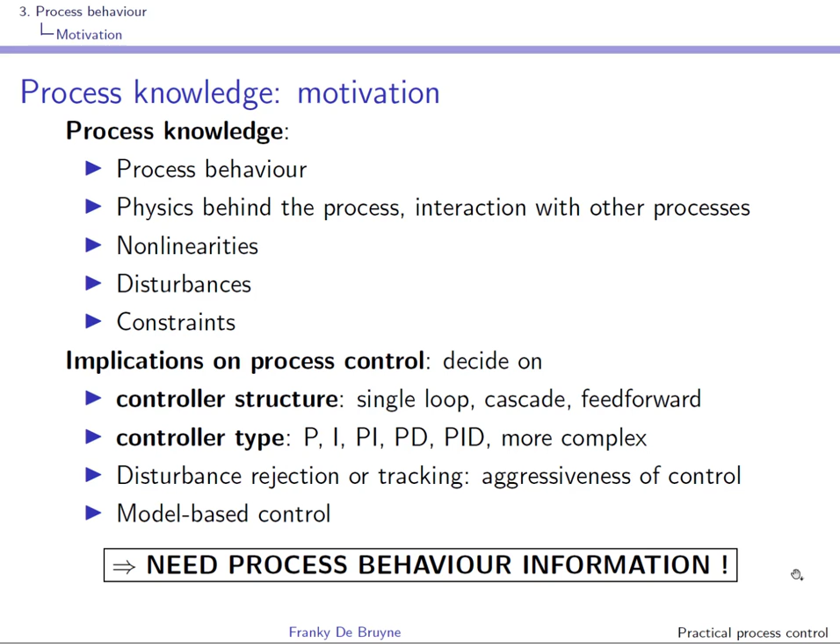At the end of the course, you should be able to select the appropriate controller structure and the appropriate controller type, given your knowledge of the process. This means that at the end of the course, and especially at the time of the exam, you must have a mental picture of all the available controller structures and controller types with their associated area of application.

We'll start this section on process behavior with a very important but rather simple concept, the concept of the process gain. In order to obtain this process gain, what is usually done is to apply or impose a step at the input.

The input is MV, the manipulated value. So the increase will be delta MV here. What you're going to do is observe the response of the system, and of course, since the system is almost always dynamical...

You'll have a response that could be this one. The idea of a gain is really the ratio in steady state, meaning the transients have disappeared because the system is dynamic. After a while the transients will disappear and you'll have, after settling, a delta PV.

The process gain is really the ratio between this steady state increase delta PV over the delta MV that has been imposed, and we'll denote this gain as Kp. Kp has units, it's the units of PV divided by the units of MV.

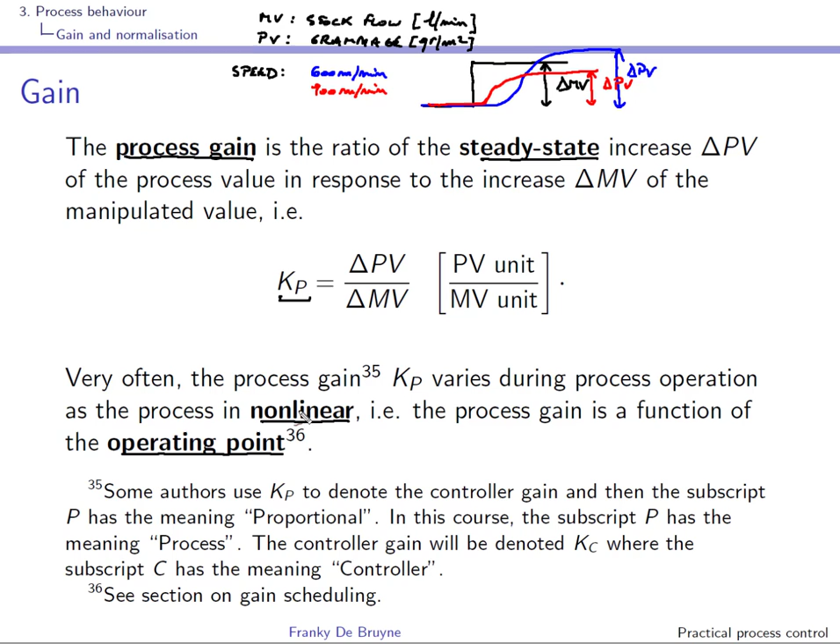Many vendors of control systems work with a normalized control algorithm, and this means that, for instance, PV has to be normalized and expressed in percent of the measurement range, PV min, PV max. In our previous example, assume that the sensor that measures grammage measures in the range 0 gram per square meter up to 200 grams per square meter.

Then PV will be normalized in such a way that 0 grams per square meter corresponds to 0%, and that 200 grams per square meter corresponds to 100%. This is what you can see from this formula.

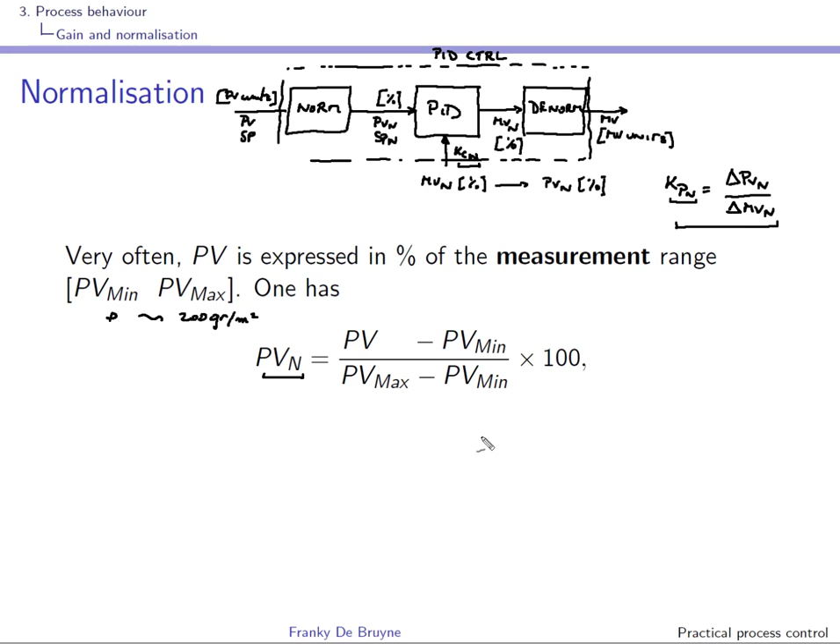As we have seen in the previous explanation, MV is also often normalized, so it is expressed as a percentage, this time of the control range MV min, MV max. So if we take our example with the stock flow, it could be that MV min is 0 liter per minute and MV max maybe 1,000 liter per minute.

So the normalized MV would be, of course, corresponding to 0 liters per minute as 0%, and 1,000 liter per minute would correspond to 100%. The output of the controller will produce the normalized MV, and you can obtain MV by turning this formula around, and this is then what you obtain.

Well, there is an actuator that is often used, and it's the control valve, and there obviously MV min is 0%. This means that the valve is closed, and MV max is 100%, so the valve is open.

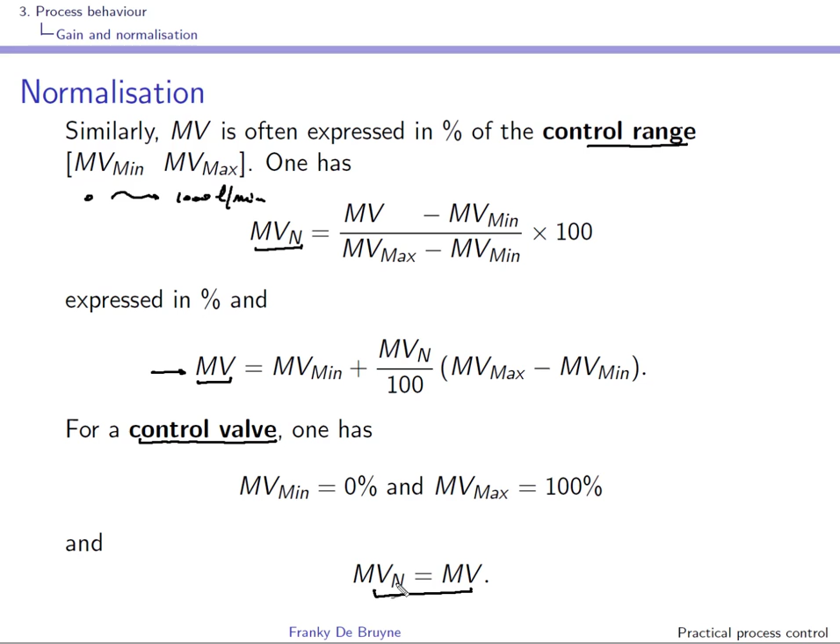So this actuator is kind of normalized naturally, so obviously MV and MVN are identical. The normalized gain of the process is defined as the ratio of the steady state increase of the normalized process value, delta PVN, over the increase in the normalized manipulated value, delta MVN. This gain is expressed in percent over percent, so it's percent of the process value range divided by the percent of the manipulated range.

Normally this normalized gain should be in the neighborhood of 1, assuming that the actuator sizing has been done properly, that there are no nonlinear effects, and if there are nonlinear effects, that you work around an operating point where the actuator sizing has been done, and that the sensor measurement range has been chosen appropriately. A first reason why the normalized gain of the process might be substantially different from one is nonlinear effects.

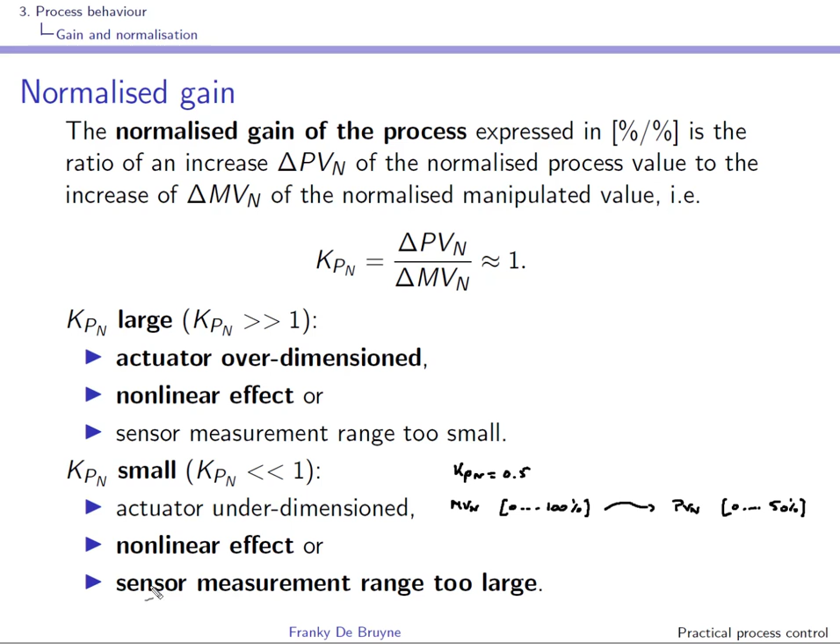So if you see a normalized gain that is substantially smaller than 1 and it is not due to non-linear effects, it's probably due to a sensor measurement range that is too large. There is a link between the normalized gain and the unnormalized gain of the process.

This normalized gain is important because some vendors implement a normalized PID controller, as I've shown. So it will be very important to use the tuning algorithms introduced in section 5 with the appropriate gain. If the PID algorithm is normalized, you have to use the normalized process gain. If it is not, you have to use the standard process gain.

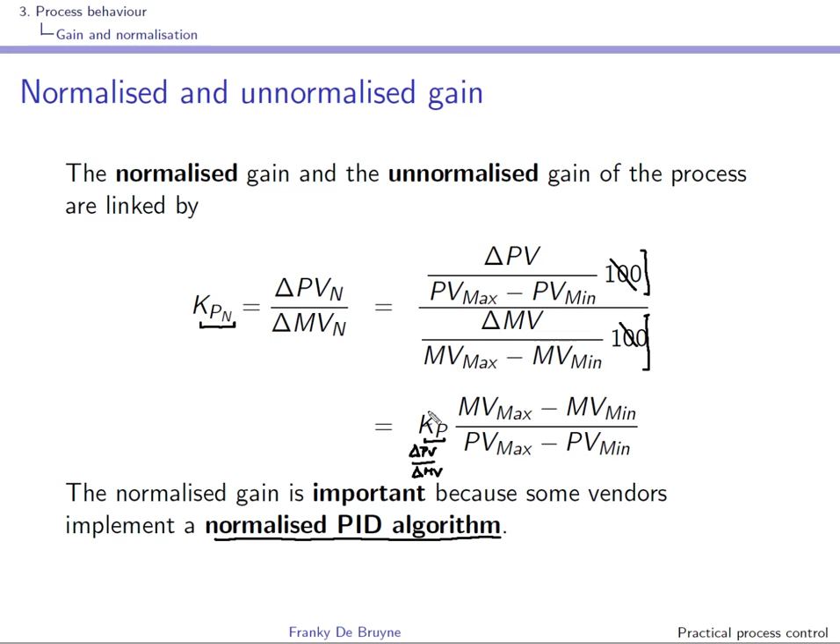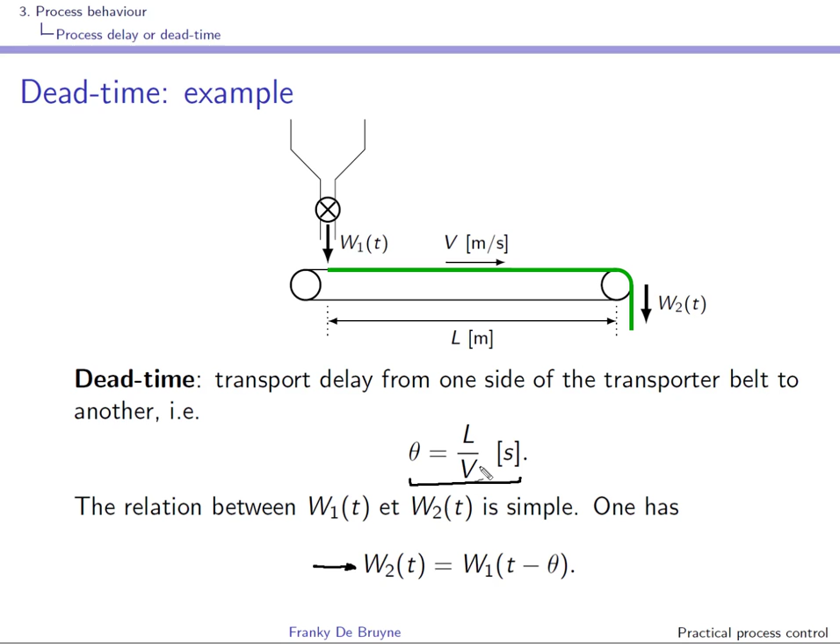This leads to a delay, and it has units of seconds. You can see here that this delay is throughput dependent, so it depends on the speed of the conveyor belt. We had seen something very similar for the paper machine. In the paper machine you also have transport of material, fibers, from the head box to the scanner. You have a distance that has to be covered, and depending on the speed, the delay will be different. So this is a good example of a non-linear system that will behave differently according to the working point, which is influenced by the speed, in this case of the conveyor belt, and for the paper machine by the speed of the production line.

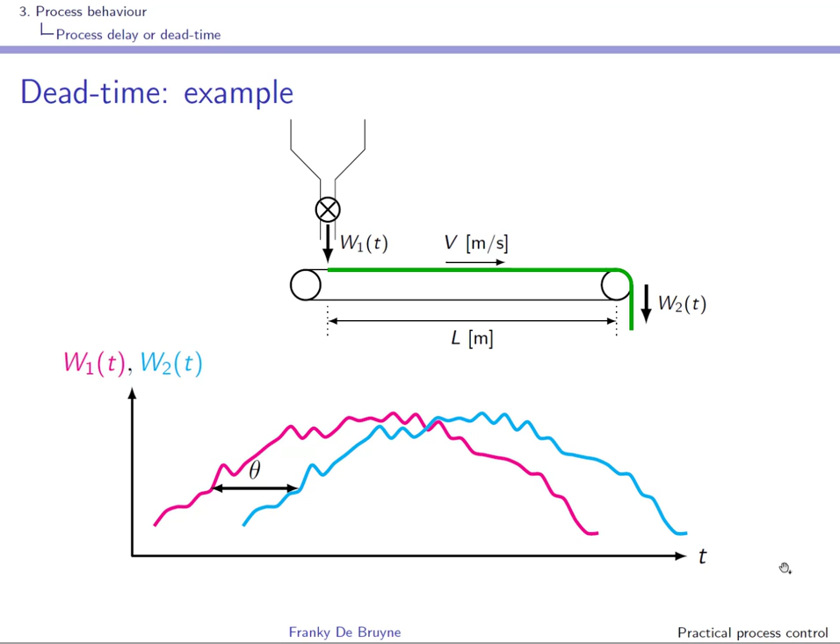Here you can see things visually. W2 is a delayed version of W1. You can clearly see that there is no amplification or attenuation, there is just a phase shift.

As we have seen, dead time is throughput dependent. It depends on speed, but it can also depend on flow. Causes are transport - I've already talked about the transport of material in the paper machine - but also a bad location of the measurement can introduce delay. For instance, a sensor can add delay, and of course when you're sampling the system there is a delay due to the zero order hold mechanism. In this course we'll assume that TS is sufficiently small that this zero order hold mechanism has very little influence.

The succession of several time constants also has the effect of a dead time. We speak of an apparent dead time. Let us have a look at that. We take several first order systems in series - let's just take 3 - and we will look at the step response. So at the input we apply a step, and then we're going to have a look at this step response.

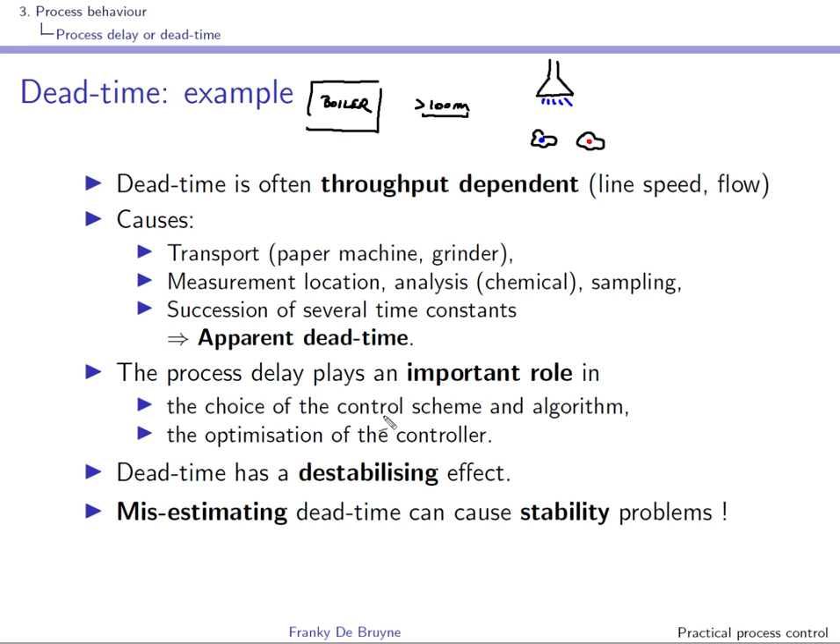After some delay, the water gets very cold again. This is typically what happens if you use an aggressive controller on a process with a dead time that is large with respect to the time constants - you will see oscillation in the system.

A delay in the time domain is PV equals MV at t minus theta, and if you go to the Laplace domain, this is what you obtain. Remember, to get an idea of the frequency response, we need to take P of S evaluated at S equals j omega, and then take the module.

This is the module of P of j omega, which will be used in the top part of the Bode diagram. Then you need the argument of P of j omega.

In our case, the process P of S is simply exponential of minus theta S. So if we replace S by j omega, this is what we obtain: exponential of minus j theta omega, with the j placed in front.

This is in polar form, so you can clearly see we have a 1 here, meaning the magnitude is 1, and the argument can simply be read as minus omega theta. There's no need for further calculation because this is obvious - you simply take the transfer function, replace S by j omega, and you immediately see the magnitude is 1 and the argument is minus omega theta.

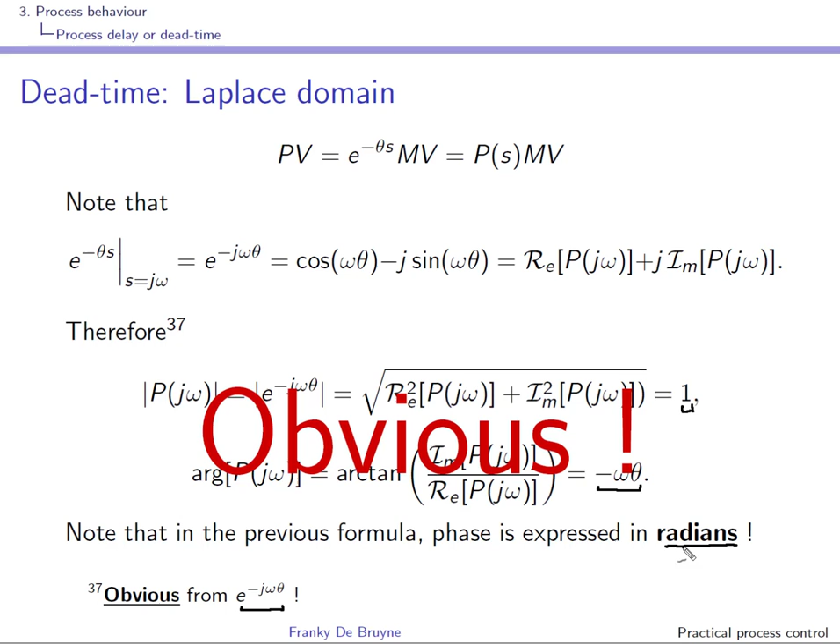Observe that in the previous formula the phase is expressed in radians. This is important - this is the frequency response for this process delay or dead time.

We had seen that the module was 1, and the argument of P of j omega is simply minus omega theta. So you can see there is no influence of frequency, and if you use dBs, the magnitude plot in the Bode plot is equal to 0 at all frequencies.

Here we see that the phase shift is increasing with frequency, so there's a linear dependence on omega, but remember here we have log frequencies, so we see this exponential-looking behavior.

You can see that you have a phase shift of 1 radian where omega theta is equal to 1. This is approximately 57 degrees. So where omega is 1 over theta, we have a phase shift of 57 degrees, which is 1 radian.

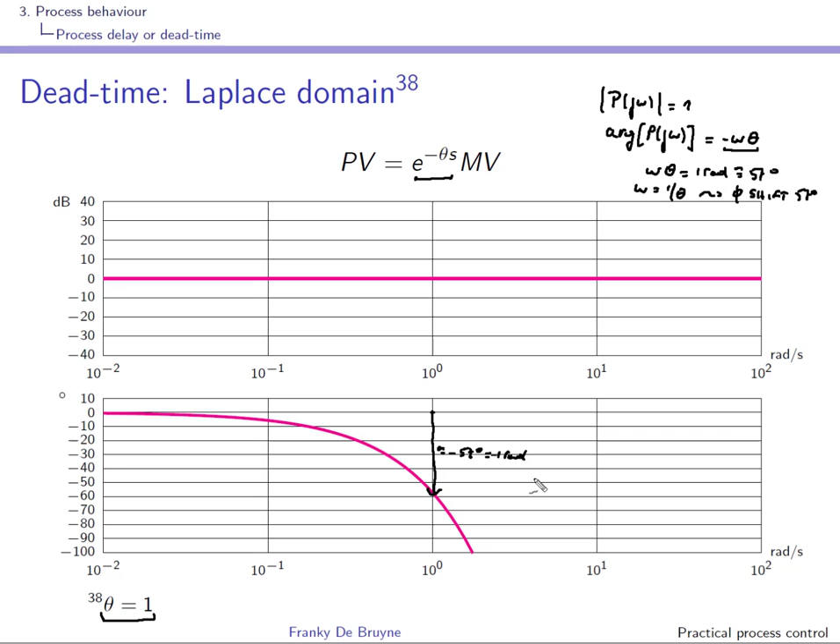We have seen in the previous section that an integrating process can be described by a transfer function H of S with an S in the denominator, with a gain kp. Here we have an output flow, but assume for now that there is no output, just an input flow.

And this is mv, right? What you can do is take an mv that is positive and look at the output level, and you will see that the level is increasing. So you have kp mv at the output. So if you can compute the slope, we will call this the slope, then kp can be determined simply by taking the slope that you observe and divide it by mv.

Here the situation is a little bit different. We have an output flow, and we will assume that it is unknown. What we'll do is a manipulated variable change. So we'll start with an mv, and apparently this mv is such that the output flow is larger than the input flow. As you can see, the level is decreasing, and after our step we can see now that the level is increasing, telling us that in this second situation the input flow is larger than the output flow.

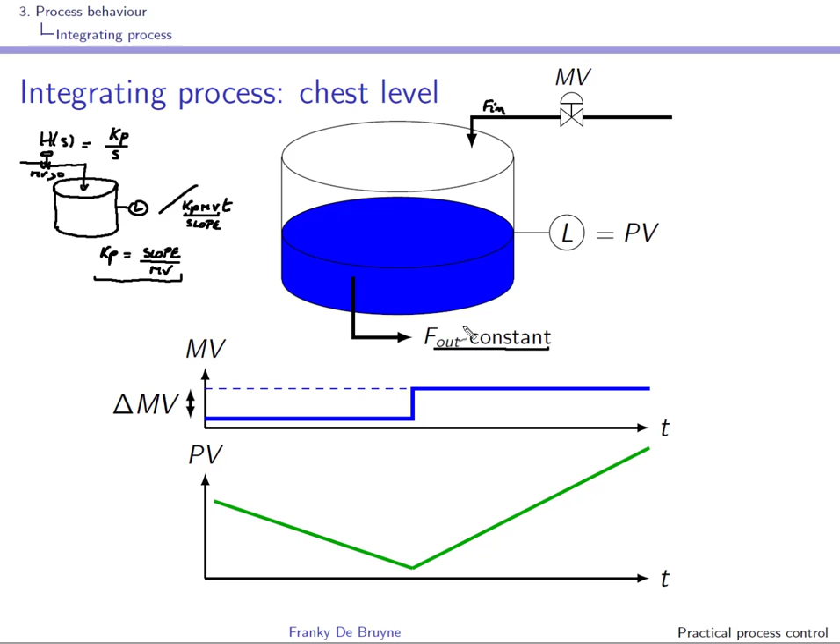In this slide we have the same situation as before, but we have added a delay, and as you can see, the delay can really be determined rather easily. You can see that after we have had the change of mv, it takes a delay of theta before you can observe the change of slope.

So remember that we have a process here that is integrating. It will have gain kp, and it is an integrating process. And what we want to do is to determine kp, and we have done this experiment on this integrating process where we had this unknown output flow, and we want to determine kp.

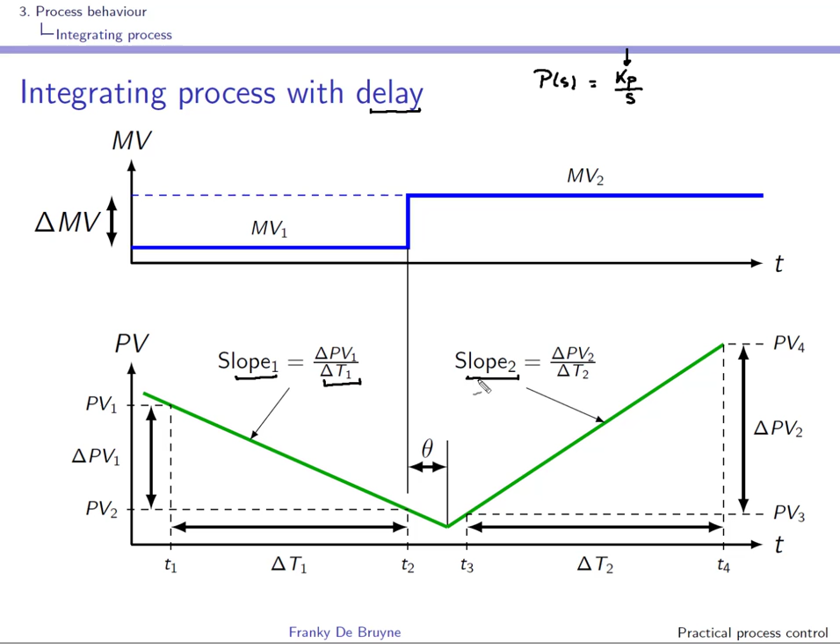So what you need to do is to compute the slopes before the manipulated variable change and after. How do you compute the slope? Well, you set a period, delta t1, and you look at the change in delta pv. So slope 1 is delta pv1 over delta t1. You do something similar to compute the slope after the manipulated variable change, and you obtain slope 2 and slope 1 experimentally.

We have here our process in the Laplace domain, and it's Kp over S. And in the time domain you can write it like this. Note that for such a process, if mv is equal to 0, then PV is constant. If mv is positive, then PV will be growing linearly. And if it's negative, PV will be decreasing.

Here we have a constant mv, so the output will be Kp times this constant times t. So what we see over here is the slope, and we have determined this slope experimentally. What you see over here is the slope for the second operating point mv2, and we have also determined this slope experimentally. So we have that Kp mv1 is this slope that we have determined experimentally, and we have something similar for Kp mv2. If we subtract both equations, this is what you obtain, and you can see now that you can obtain Kp experimentally from this experiment shown in the previous slide, and this is done independently of f out. Of course, f out has to be constant.

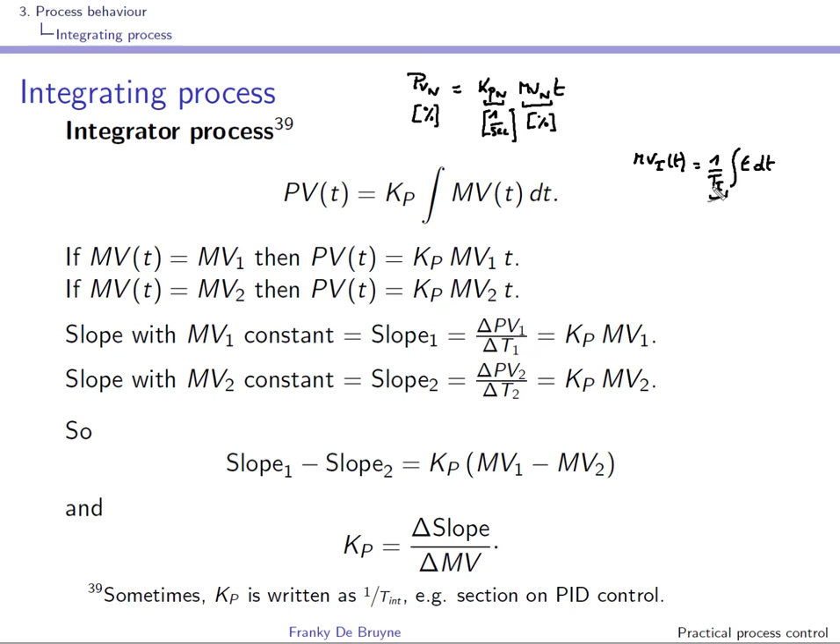The integral action will be 1 over Ti, the integral of the control error. And you can see here that the gain of the integral action has been written as 1 over a time constant.

We have just seen how you can obtain the gain of the integrating process experimentally, but very often you do not need to do experimenting. For instance, the level of the tank is linked to the input flow by an integrating system, and the gain is 1 over the section of the tank. For instance, the voltage on a capacitor is linked to the current by an integrating process, and the gain is 1 over the capacity. And you could add, for instance, that the current through an inductor is linked to the voltage by an integrating process, and the gain is 1 over the inductance.

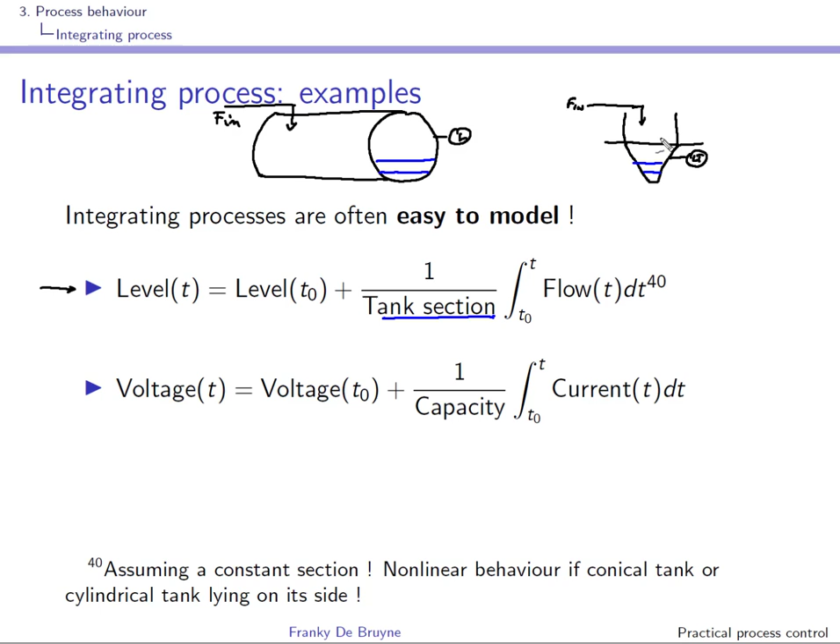You'll have something very similar if you have a conical tank. In this region, below this line, the relation between level and input flow will be non-linear, as the section is changing all the time. When you're above this line, things become linear again, and then you have the standard integrating process. We can now have a look at the frequency response of this integrating system.

Remember that we have to take P of S, evaluate at S equal to j omega, and then take the module and the argument. In our case, we'll have Kp over j omega. The module will be Kp over omega, and the argument of P of j omega, because of this 1 over j, is minus 90 degrees, and this is clearly observed here in the phase bode diagram.

Now we have to look at the module. You can see that this module is evolving as 1 over omega, but in a log frequency bode plot, this looks like it is evolving linearly. And the slope here is minus 20 dB per decade.

Where is this coming from? Well, we are working in dB, so what we have to do is take 20 log 10, and what I'll do is look at what happens when I multiply the frequency by 10. So we'll have Kp divided by 10 times omega, and we'll use this formula that log of A times B is the log of A plus the log of B, and this is true in any base, so also in base 10.

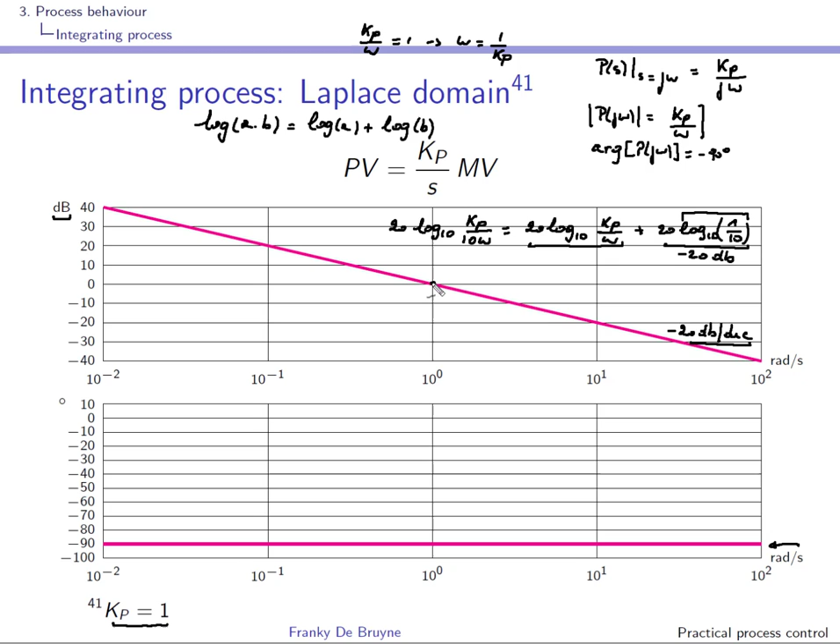Another important fact is that you can determine the gain by just looking at this bode diagram. The frequency at which Kp over omega is equal to 1 is, of course, omega equal to 1 over Kp. In our case, Kp is equal to 1, so the frequency at which we'll have a gain of 1, which corresponds to 0 dB, is indeed here at the frequency of 1 radian per second.

This is more intuitive than you think. If you take an integrating process, 1 over S, and at the input you apply cosine omega 0 t, assuming that you're at steady state, what will come out, if you integrate this cosine, is the sine of omega 0 t divided by omega 0. And the sine is really a cosine that has been shifted by minus 90 degrees. So this is what you see over here. The gain is 1 over omega 0. The smaller the frequency, the higher the gain. And this is also what you see here in this bode diagram.

Let us look at the following loop. So we have an integrator, kp over s, and this very simple loop with a minus and a plus over here. And we'll put a 5 at the input, and we'll ask the question, what are the values in steady state?

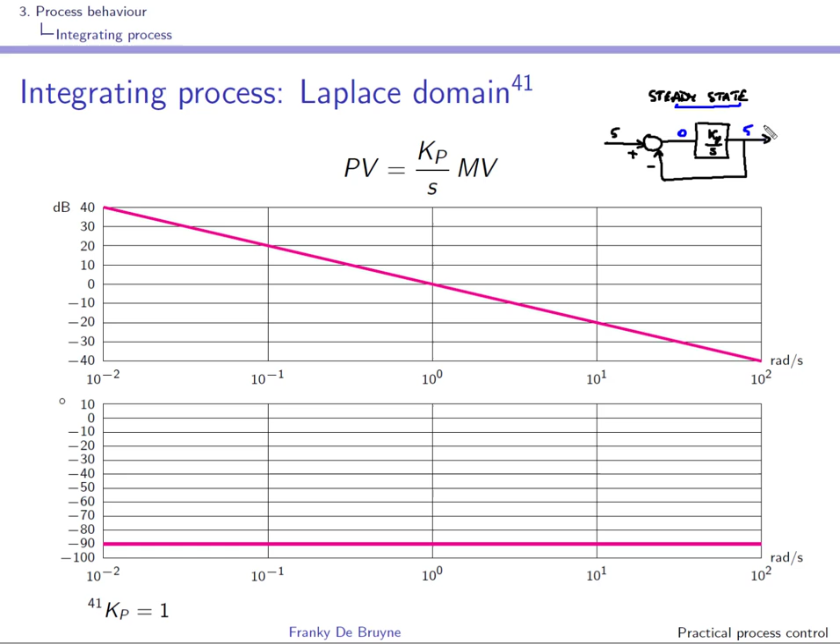Well, the only steady state that is possible is to have a 0 over here. If we have something positive, it will be integrated and it will evolve, so it's not steady state anymore. So if we have a 0 over here, it means that we have a 5 and a 5 over here. So here you can clearly see that in steady state the gain is infinite, and this is indeed what you see here in the bode diagram. And when you encounter a process where you have an input that is 0 and an output that is finite and non-zero, this means that there is an integrator in this process causing this effect, and this integrator will cause an infinite static gain.